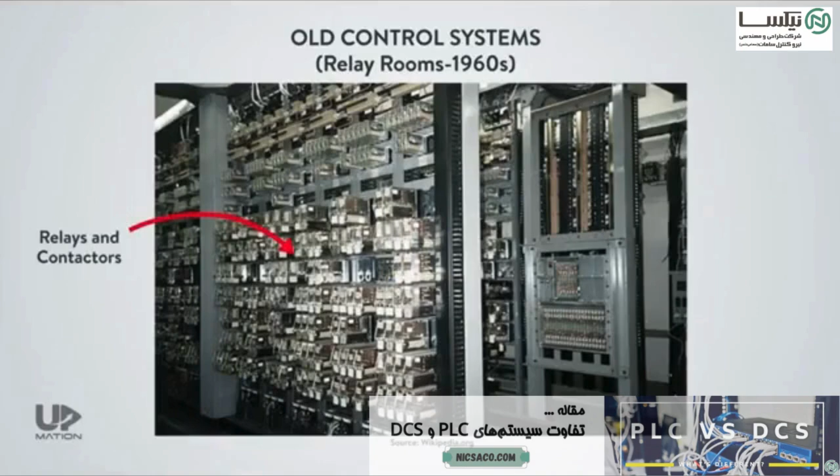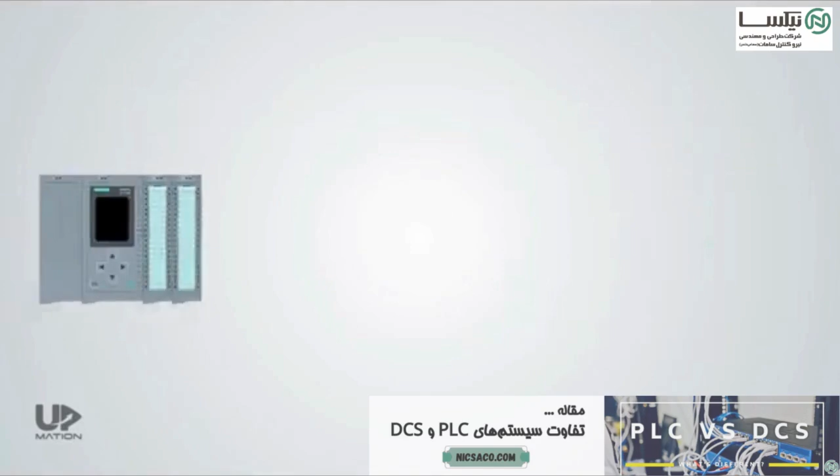The primary goal of the PLC's invention was to replace the old control systems, which were entirely made of relays and contactors, or digital signals in other words. DCS, or Distributed Control System, was made a few years later not to replace the PLCs, but to satisfy other needs in the automation industry. Therefore, PLC and DCS have coexisted in the industry for many years in different applications, and they have their significant pros and cons.

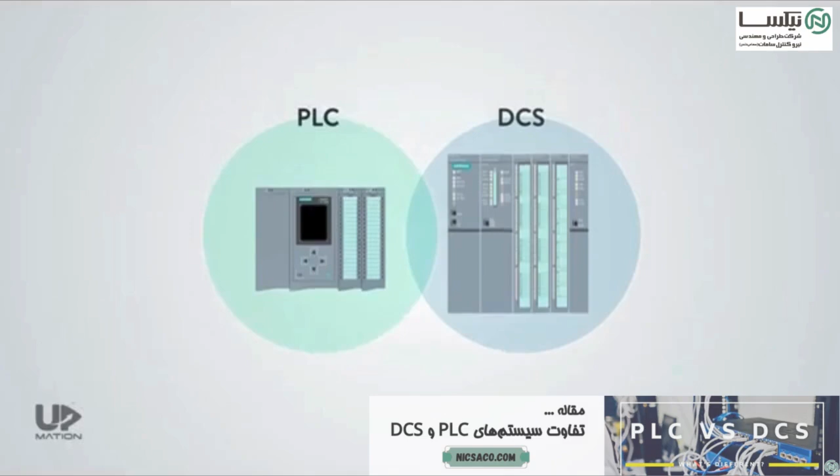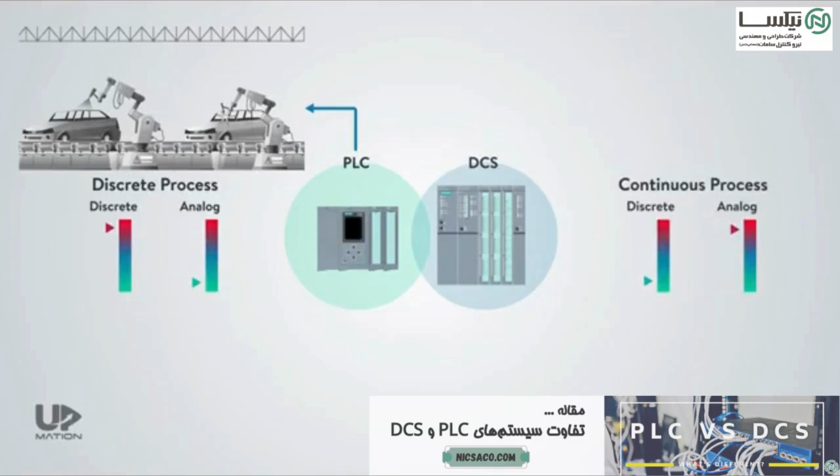Although PLCs became more advanced and sophisticated these days, and are even able to control PID loops and analog signals, they are more appropriate for discrete process automation, such as the automobile assembly line, in which there are lots of digital signals and a few analog signals. DCS is more applicable for continuous processes with lots of analog signals and complicated PID control loops, such as processes in a power plant or a refinery.

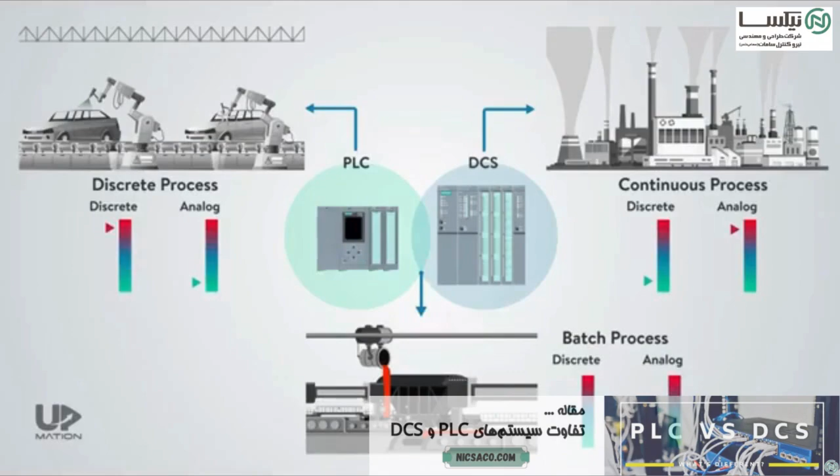In batch or hybrid process automation, like some steel-producing industries, in which we have to use DCS and PLC together, there would be some overlaps in their functions, meaning that we may use the PLCs to process a limited number of analog signals and PID loops, in addition to processing the digital or discrete signals. Consider that, as the number of control loops and analog signals assigned to a PLC increases, the control reliability of the process decreases dramatically, because if the PLC fails, then all the loops assigned to it will be out of control and the whole process fails consequently.

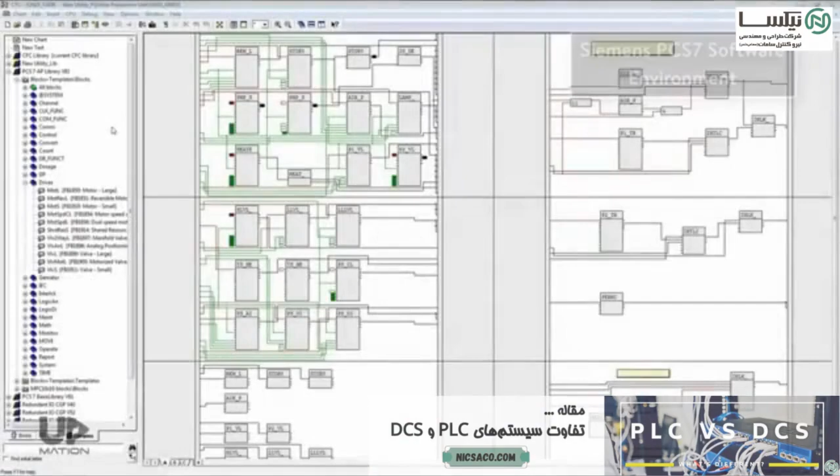On the other hand, if we use the DCS to process discrete signals, since the reaction time or scan cycle time of the DCS is fairly high in comparison with the PLC, real-time control of the process would not be possible. The high reaction time or scan cycle time of the DCS is due to its heavy processing duties. For example, the DCS uses high-level programming languages, such as CFC or continuous function chart, to offer extended and very useful programming, monitoring, and engineering facilities, like lots of predefined functions. These high-level languages generate lots of code after being compiled and put lots of burden on the CPU. As a result, the response of the system to important inputs will not be fast enough.

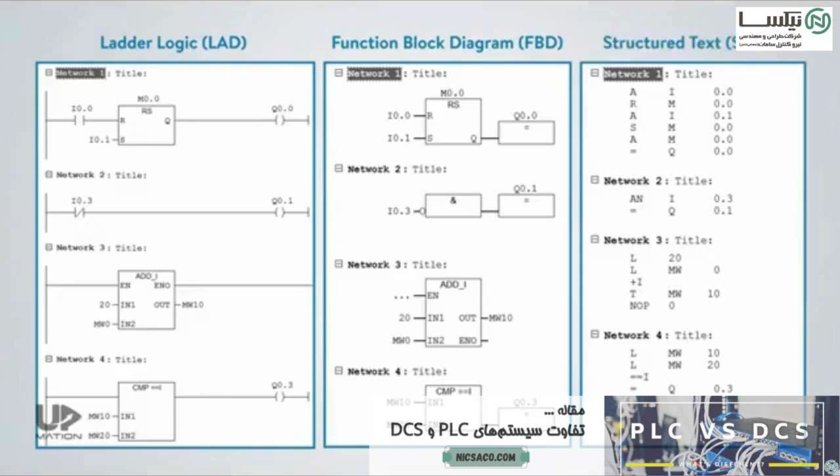On the contrary, the popular low-level PLC programming languages, such as ladder logic, function block diagram, and particularly STL or structured text language, are closer to machine language. Therefore, the generated code is remarkably smaller than with DCS programming languages. That's the reason the PLC is used for emergency systems.

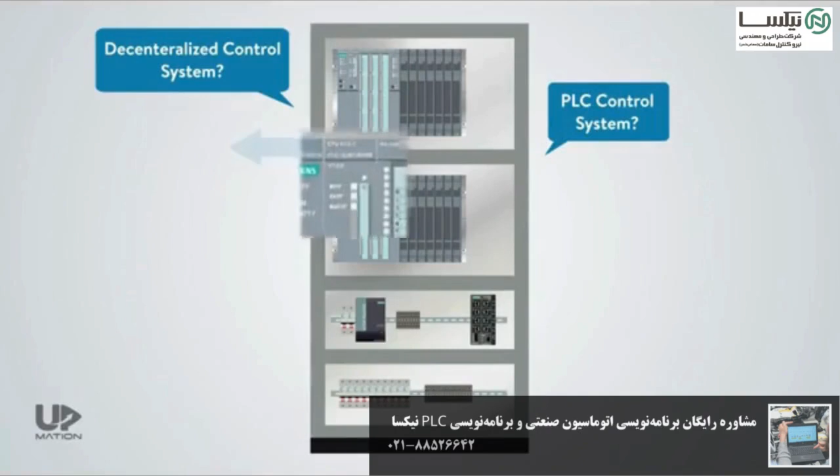So to take advantage of languages like CFC, the hardware of the DCS should be more powerful than a PLC system. However, with today's advancements in technology, the hardware of DCS and PLC are closer to each other. Sometimes it's not possible to judge whether a control system is DCS or PLC only by looking at its electrical control panel. Even in some cases, PLC control systems employ the same CPU as the ones commonly used in decentralized control systems. Finally, there are the DCS and PLC monitoring system differences.

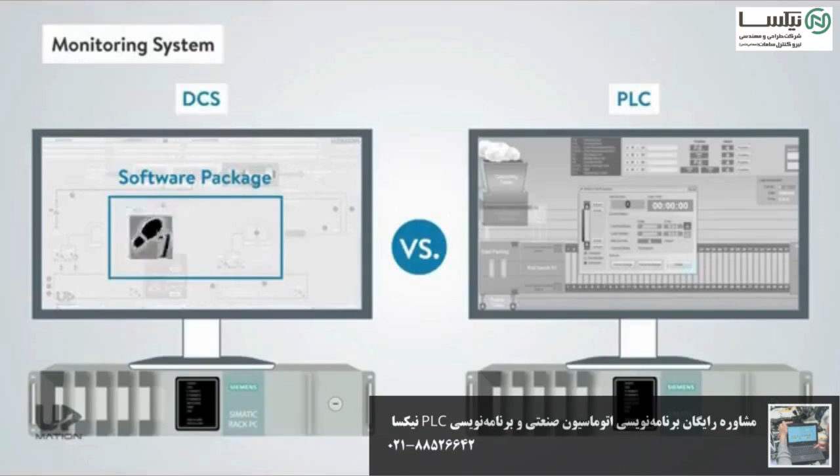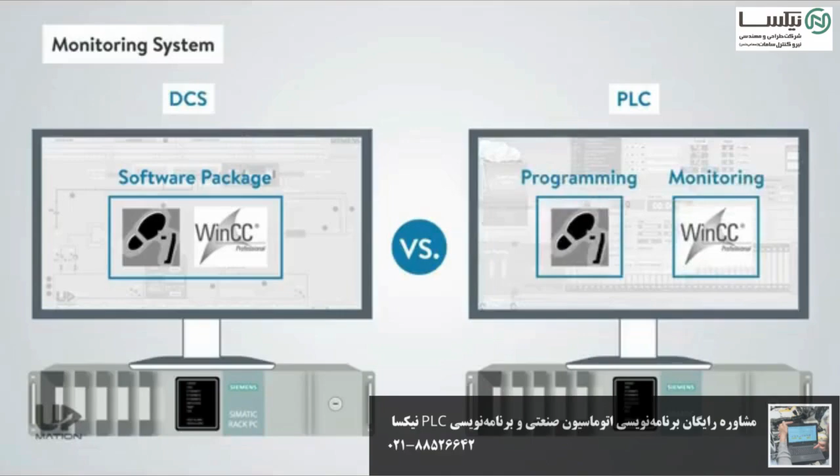In DCS, there is an integrated software package with a fairly complete set of monitoring facilities. By calling the control functions into the programming environment, their corresponding graphical objects will automatically be added to the HMI pages with their addresses. In this way, we save some precious time. In PLC systems, however, there is usually no relationship between the programming and the monitoring environments, and they need their own time to be created and developed.

As a last point, decentralized control systems are more reliable in comparison with PLC control systems, not just for being decentralized, but for usually being redundant at different levels, from CPUs and power supplies to servers, network switches, and network cables.

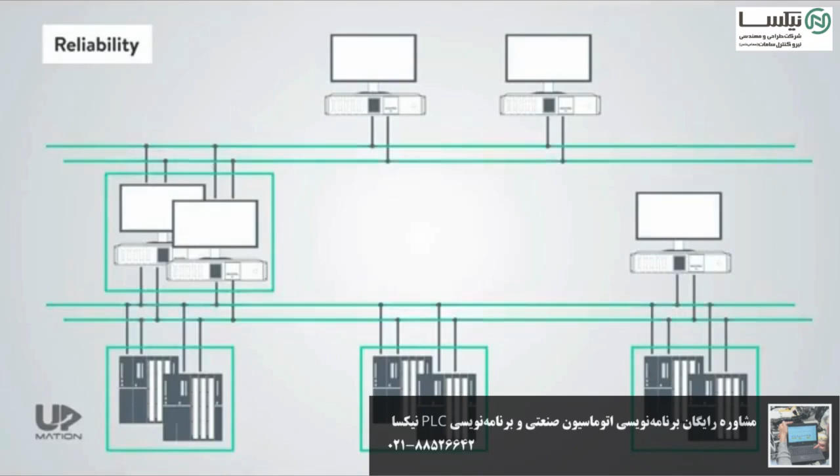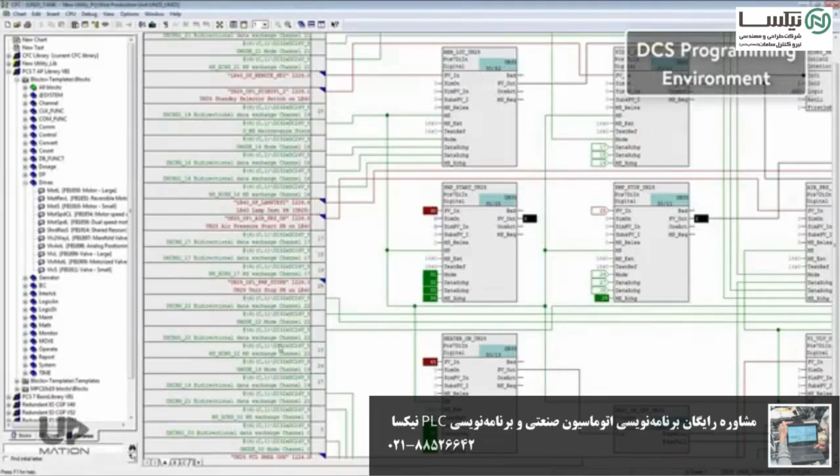There are lots of benefits in using both the DCS and PLC. As the DCS response time is longer than the PLC's, the DCS is better used for processes with more analog signals and PID loops, whereas PLC systems are better for processes with more discrete and fewer analog signals. In DCS, we can benefit from numerous predefined functions and function blocks and its high-level programming languages. But in PLCs, we often have to write and define the functions ourselves.

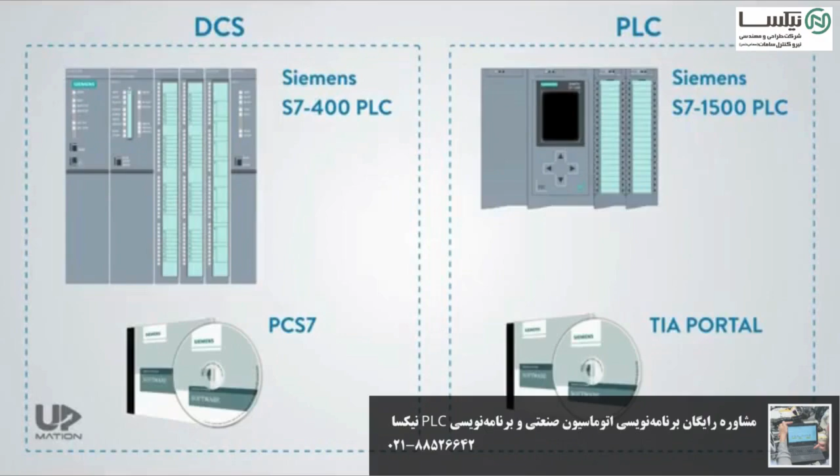We also talked about the benefits of the DCS in designing the monitoring system. The network architecture of the DCS is much easier to implement, using its integrated software and hardware package. However, DCS software and hardware packages cost a lot more than PLC equivalents.